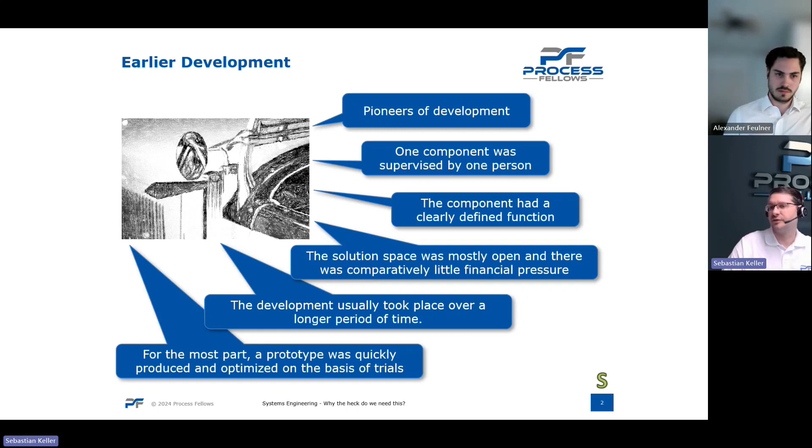In some cases, in the early development, there were inventors that were developing a component or a system for their whole life, for example. It was the use case that you just tried to get a prototype, did some trials, and when it worked, you used it and improved it. But in the present, that's not possible.

What is development nowadays? What are the changes from the early development to the actual development? We got way shorter development times. I think everyone of you knows the customer with his milestones, and the worst thing you can do is to not achieve a milestone in time. I think that's one of the most important things.

As I mentioned, in early development we got components that had only one functionality, only one sense. In actual development, we got cross functionalities. We got components with lots of functionalities. We'll get to some examples later on.

Also, we got much more interfaces in the components. We got interfaces from software to hardware, and we'll see later on to mechanics, from hardware to other hardware, from software to other software components. There are lots of interactions within only one ECU or between ECUs, for example.

And therefore, we got in the last decades a highly distributed development. There are software teams all over the world with experts all over the world, and it's not only one person at one site or one team at one site who is developing. It's just all over the world.

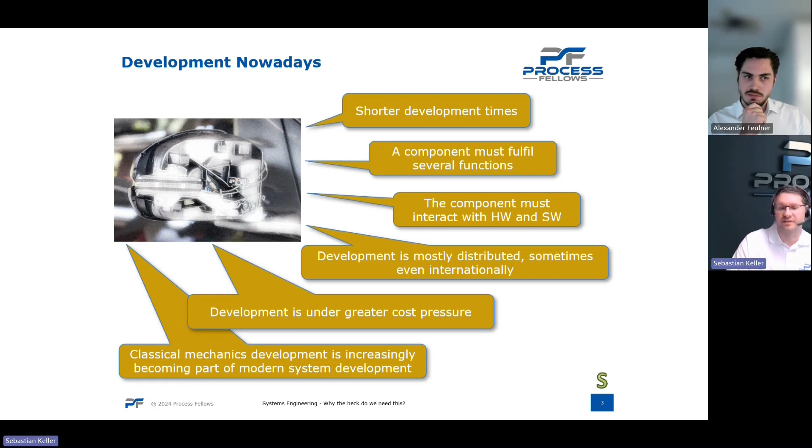In addition to hardware and software, it's getting really complex systems with different kinds of structures we need here. So hardware development, software development, and mechanics development are based on different approaches because we got this in history.

In the first step, they tried to assign work packages according to country, not to knowledge. Every country should get one work package. And that was a big failure. So the Europa rocket didn't fly successfully at once.

And what did they do? They had to get to a better development approach. So what did they change? They still used work packages, but in this case they screened who had the experts for the work package. They coordinated everything from a central position, instead of everyone doing his work package without coordination.

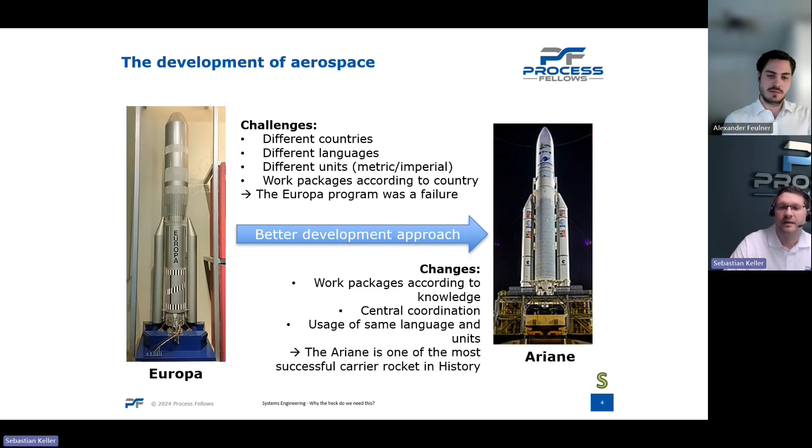Another example is the radio in the automotive sector. In former times, we got only a radio that made some music or sound. In the past decades, the functionality grew from just a radio to being a whole infotainment system, which is way more than just a radio. For example, it's a steering unit for nearly the whole vehicle.

You can use it as a radio, but you can also use it to screen all the sensors of the vehicle, all the surroundings, to adjust whatever you need, to communicate with everyone in the vehicle, or have meetings. That's part of the functionality. The functionality of just one component grew very much in the last decades.

Another point is the complexity. I think a radio is not very complex - it has just a function and some transistors, maybe no software in it. In present infotainment systems, it's not just a system, it's a kind of system of systems. There are very many ECUs that have to work with lots of sensors in the car, communication interfaces, hardware interfaces, mechanical interfaces, and actuators. So the complexity of those systems has increased very much in the last years and decades.

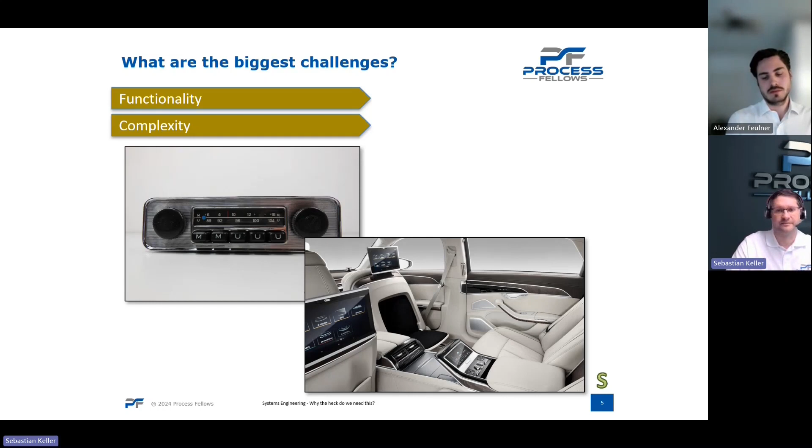Another example of the challenges in the last decades is distributed development. I've already mentioned that development was distributed all over the world. In the 1970s, for example, we had a component developed by a supplier, a tier 1 supplier, that had a project at his site with his project team on site - it was easy development because everybody was at one site, one team, no interfaces around. In the years after this, it started to grow bigger and bigger.

Companies started to grow bigger and bigger. You had to get experts from nearly all over the world. So the companies started - in this case the same supplier already had two locations, maybe one in Europe, maybe one in Asia.

And nowadays it's way more distributed. We have a tier 1 supplier that can have a tier 2 or even tier 3 supplier. We can have several software components from all over the world where teams never meet and only get their interfaces online. So it's way more distributed in the last decades than before, and that's one of the great challenges - to coordinate those teams and that development all over the world.

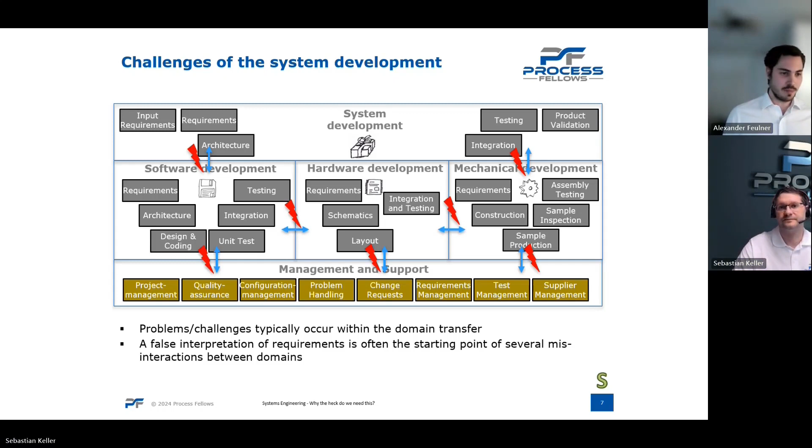And now I got a question - how to solve this? Alex, maybe you can help there. I'm pretty sure I can. So let's come to the next slide.

All right, so this is a wrap up of what Sebastian already presented. We have various challenges, not only in the automotive sector. System engineering's origin really comes from space engineering, but it can be found in various domain industries, for example railway or medical systems. For the rest of the webinar we concentrate mainly on the automotive sector, but I'm pretty sure these challenges reflect to all of these industries.

So what we have seen is that complexity is increasing over time. We have certain technologies coming into place - for example in the automotive industry we now have artificial intelligence, but also functional safety and cybersecurity aspects. We need to make sure our system is secure by design, which is another requirement here. We have seen that in early development, the domain development was pretty mixed.

Now we have some specialization of domains. So we have the real software experts, we have the hardware experts, we have the mechanic experts. They're real experts in their disciplines. So this has also changed and also has an impact. And of course, we need to bring our products faster and cheaper to the market. This applies to all industries.

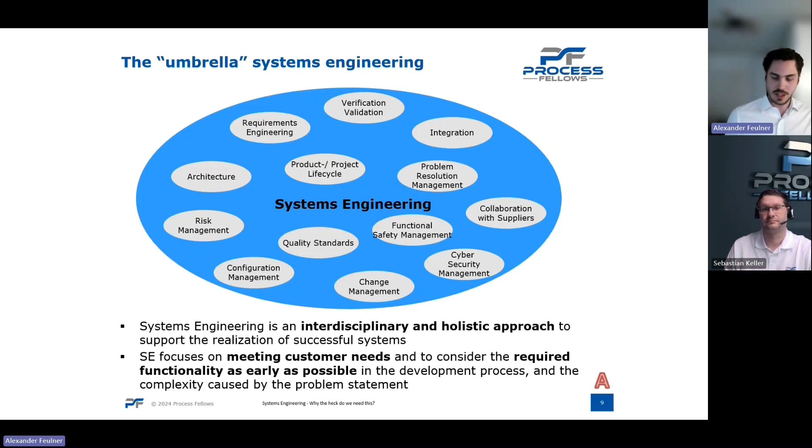I like to compare the systems engineer to an orchestra. So the systems engineer, let's say, is the musical conductor and needs to control every music instrument. If you would like to compare, this is the same topic here with the certain disciplines. And of course, we also have a standard for systems engineering. I just want to mention it here. We have ISO 15288, which concentrates on system lifecycle processes. But we are not going deep into that standard.

So what are some main activities of systems engineering? This is really high level, but I want to show it to you quickly. A typical method or activity in systems engineering is to identify your system levels. Where are you operating? As well as structuring your system. So you need to identify your components and your interfaces. We will have some examples on the next slides.

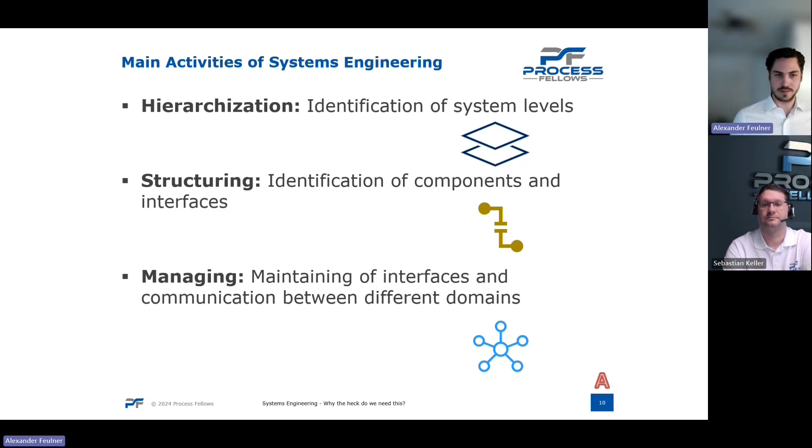And of course, a very important topic in systems engineering is the communication aspect and the communication between different domains. Typically, from our experience as consultants, when we come to suppliers or even some OEMs, it is very challenging to distinguish between the real different system levels. Of course, we have at a certain point our overall vehicle system level in the automotive industry, and at the lowest level displayed we have the hardware, software, and mechanic domains.

But between that, we have various subsystem levels, and it is often difficult to really find the organization and the product at one specific level and the real target level. In Automotive SPICE assessments, for example, this is a short excerpt here: if we have various subsystem levels and different product parts, we can make some instances to rate them.

But in this example, I just wanted to highlight that we have the vehicle, for example, then we have our powertrain system, which is the first subsystem level. And this subsystem level, depending on your complexity and how you want to structure and develop your product, can have a variety of subsystem levels, which you decide and which fit best to you. In our example, we only have three subsystem levels, just to simplify it.

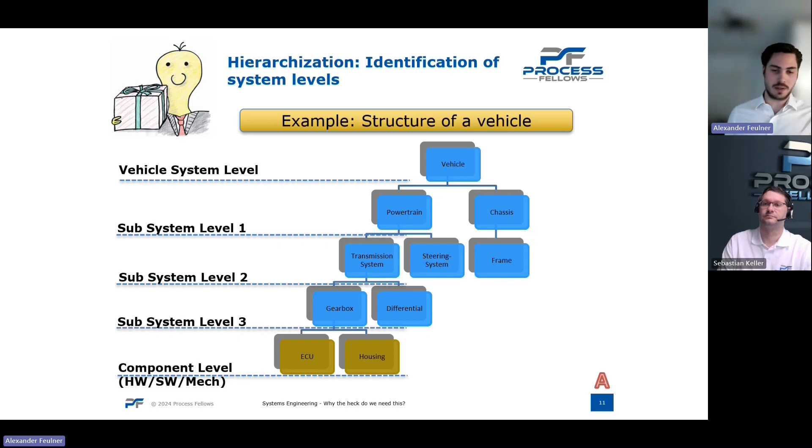Coming to the next activity, sorry. So the next activity is also a very important one. It's the correct identification of components and interfaces. So if you take a look at this, this would also be the subsystem of the door system. The door system consists of several parts. You have the window, then of course the dotted line here is the system context.

So really how the door system is interacting with your environment. You have the user, but you can also have an external control unit which controls the door system. And this consists of, let's say, switch, control engine, and the lifting device. And on that level, you can already tag, or make your thoughts on, what unit, what block, can later be done by hardware, by software, by mechanic.

So this is about identifying what components you have, if the components can be realized by hardware, software, mechanic, and what are the interfaces to each other. So this is another big and important aspect of systems engineering.

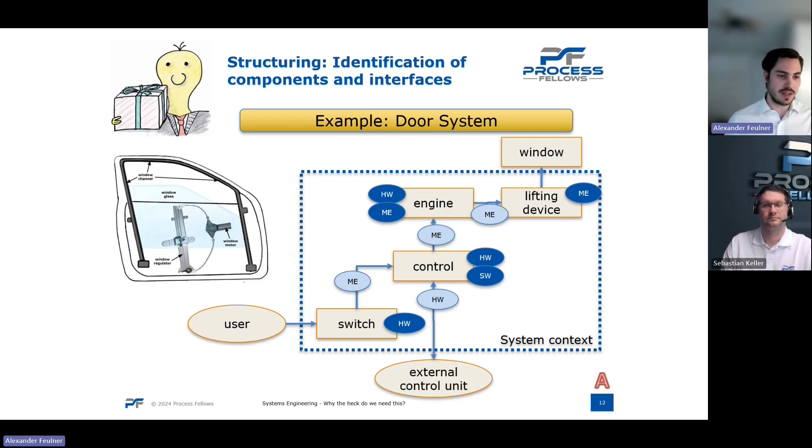And another activity is the communication. So Sebastian already mentioned it earlier. I would say pretty much every system consists of various levels. We have, of course, the overall system level, but then we have the software domain, the hardware and the mechanic domain. And as a system engineer, it is important to have a look at the interfaces and to really understand the needs of the specific domains.

And sometimes to, let's say, translate between domains and to map the requirements of each other to really get the complexity and to develop the product. And this is a very crucial thing, the domain communication.

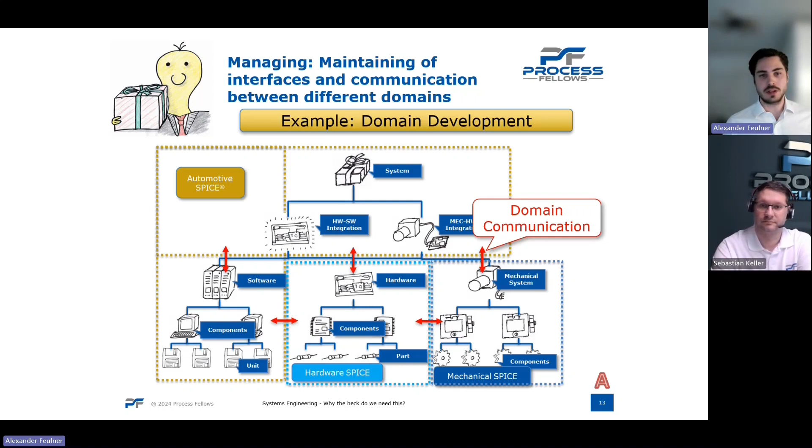We can see it here, for example, the hardware-software interface. This is something which comes into place especially when developing functional safety, but also the agreements between the different domains. We have several SPICEs for hardware, mechanic, and also software. And for the integration aspects, you really need to communicate between the domains.

So what are the competences of a systems engineer? These are some aspects, from our understanding and also from the literature, that a system engineer needs to have some certain skills. So, like I said, if you compare it to the musical conductor of an orchestra, the system engineer needs to have a good understanding about the product, about the overall system, and needs the big picture view. So to really understand what is going on with our system.

As well, the system engineer needs to concentrate on how several singular system elements change over time. As you remember, we have the ISO standards. It's about system lifecycle processes. The system lifecycle is not only the development phase, it's also when it's in the field and when it comes to decommissioning. So we have a whole lifecycle, and this needs to be also maintained.

What else is there? So the system engineer needs to concentrate on the structure of the system and also to really identify how my system structure can interfere with a certain system behavior. So this can also have an impact. Another good example, we come to that later when we talk about model-based systems engineering, is that we have various viewpoints or different angles to look at your system.

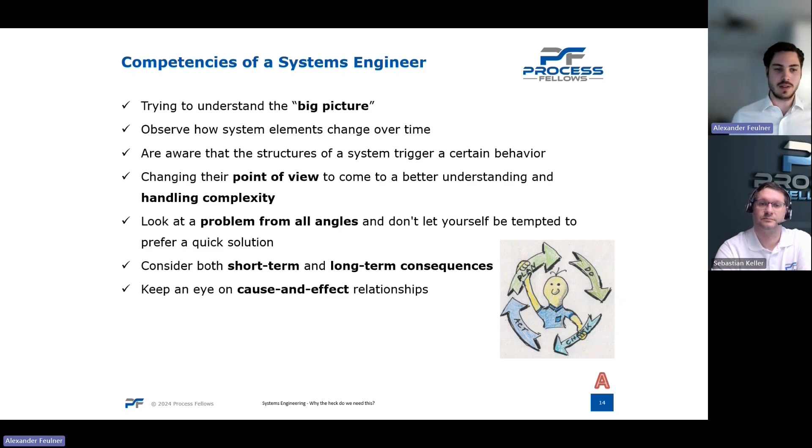So let's point out some responsibilities and some solution spaces of systems engineering. The responsibilities of systems engineering are: aspect number one, communication. So you need to balance between domains. You need to discuss with them. You need to come to an agreement. You need to talk about certain aspects with them. So it's really about balancing the conflict between domains to get the solution.

Also, we need to have an efficient and goal-oriented management. This is also, of course, very important. When we're talking about the long-term effects, we need to have strategic thinking. So in classical systems engineering, you really develop a systems engineering management plan so that you consider the long-term aspects as well, not only the short term.

Strategic thinking can also be that you have, for example, an architecture criterion that you want to develop your system or your products to be, let's say, reusable. This can also be a way of strategic thinking which comes into place here. And another aspect: systems engineering should bring knowledge to all levels.

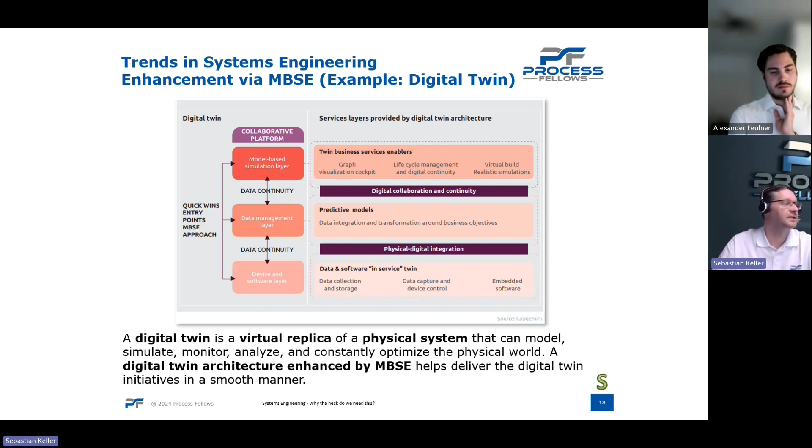You can reduce your cost because you don't always have to get a new prototype if you want to see some impact. Through this you can get a faster time to market. If you can simulate impacts, you don't have to wait until you get a new prototype and have it tested. So it will improve your development speed.

Also, you can get higher variability. You can try several possibilities in your simulation: several mechanical parts, several materials, or in electronics, several different ways to configure your device or component. This will lead to higher quality because you know more influences at an early stage of development. You don't have to wait until the late stages to see the impacts.

Also, you will get a higher grade of automation because you can simulate very much, depending on the level of your digital twin. But as you see in the red parts, it's not the real environment. It's still a simulated environment, so it's not possible to replace everything. You will need some physical systems to finish your testing, for example. It will be necessary, but you can improve it. You can predict some of the test results, for example.

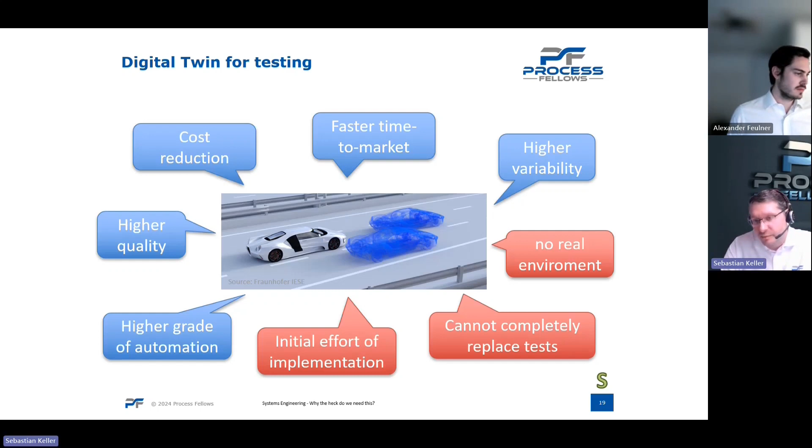Another point, of course, is that there's an initial effort to implement those digital twins. You have to program your surroundings, your environment, your simulation. But in general, it's a good way to get to market faster and to see impacts of other components and surroundings very early. So it's just one example of what is possible through systems engineering, and it's far more. Yeah, I think we're already nearly done.

So in general, what did we talk about today? Development is getting more complex, with more functionalities, more distributed, and we need solutions to these challenges. If we don't solve them, very high budgets will be necessary. The schedules will explode, the resources will explode. So we need a new approach, and that's shown with systems engineering.

As Alex showed us, demand for systems engineering is increasing. We saw that nearly all big OEMs in Germany want to use systems engineering. They need people who do systems engineering because, as Alex already mentioned, they know it is necessary. Systems engineering in the end means taking over responsibility and finding solutions for the complexity, not only for the development itself, but also for the challenges that come for the organization.

There are various methods in systems engineering, so you can use it for various challenges in development and in the strategic approach. And for future development, as Alex already said, you need a strategic approach, and that can be systems engineering. It's not the only solution, but it's a good solution.